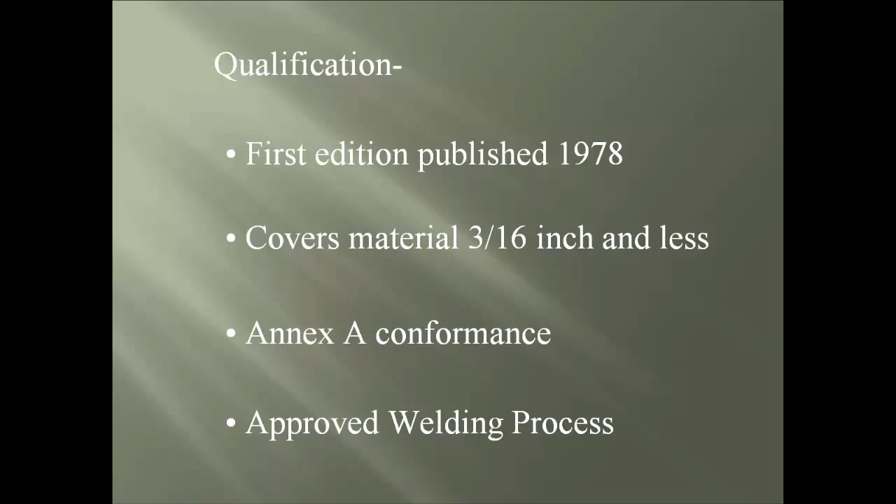The electrode for shielded metal arc welding process shall conform to the AWS A5.1 specification for carbon steel electrodes and the AWS A5.5 specification for low alloy steel. Now, if any other electrode specification is needed to be used, it must be approved by establishing a PQR.

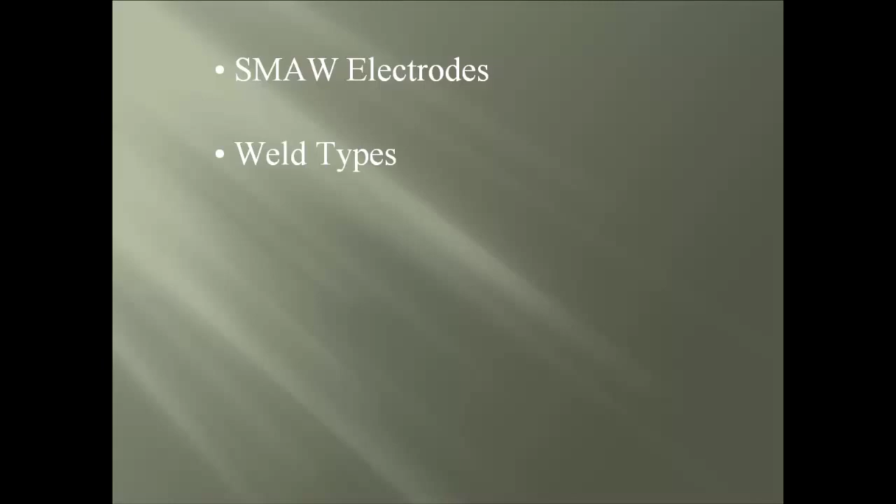The following weld types are approved: the square groove in a butt joint, fillet welds in a lap or T-joint, flare groove, arc spot, arc seam, and arc plug. The way to match the correct filler metal with the base metal being used is found in Table 1.2.

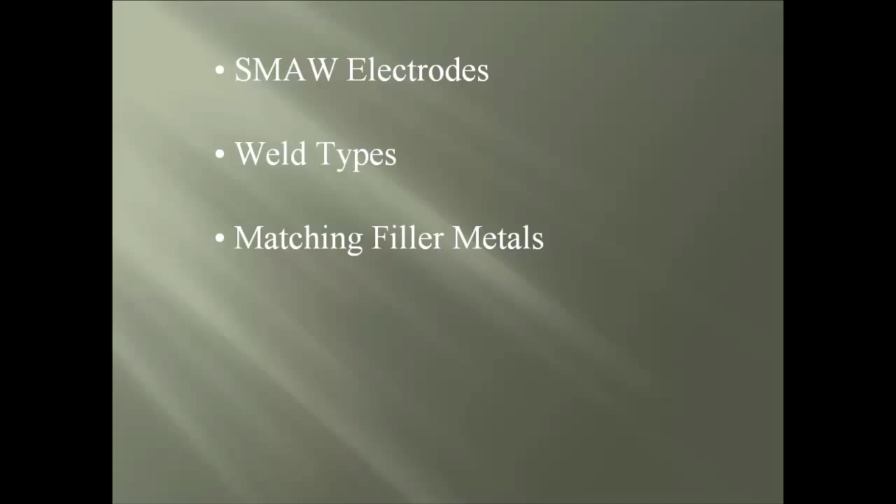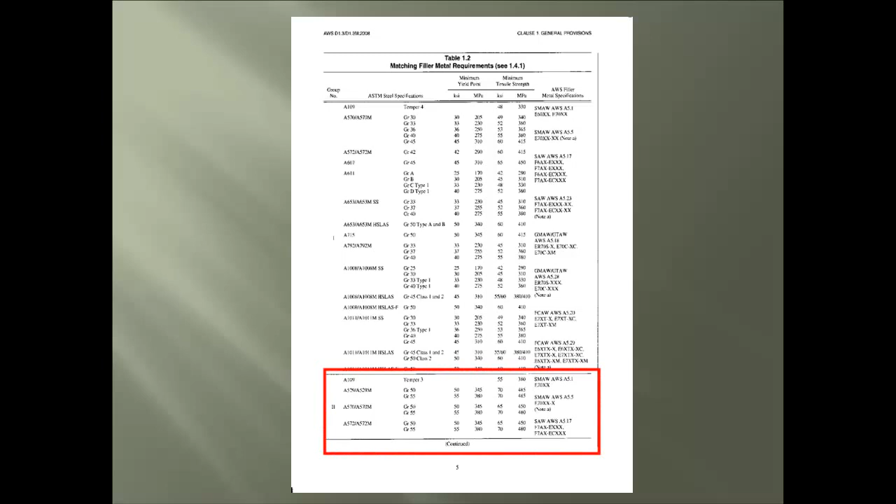Here we see the AWS Table 1.2, and we will take a closer look at this section of the table. The QC and QA professional needs to understand that these two parts of the table must work together for finding the correct information. So first is the grouping callout. And with the closer look, you see we are in group number 2, which is how the base metal is sometimes referred to.

Next, we see the actual base metal specification plus the grade for this group 2. Now a quick tip. You might have seen the same base metal found in another grouping, but slow down and check the grade, which will be different.

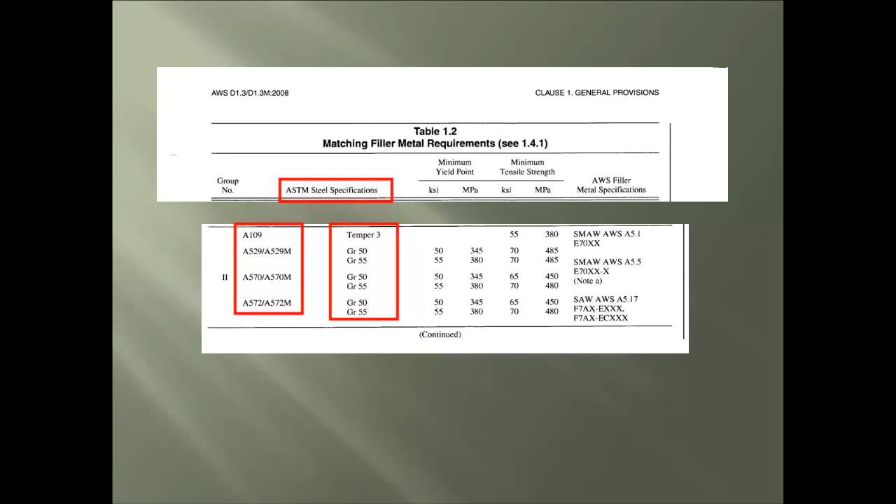Next are the two areas that cover the minimum yield point, providing the KSI, which means kips per square inch, and the MPa, megapascals, numbers. And then the minimum tensile strength, also providing the KSI and megapascal numbers. And lastly is the filler metal specification and classification that is approved to be used with the base metal within this group 2.

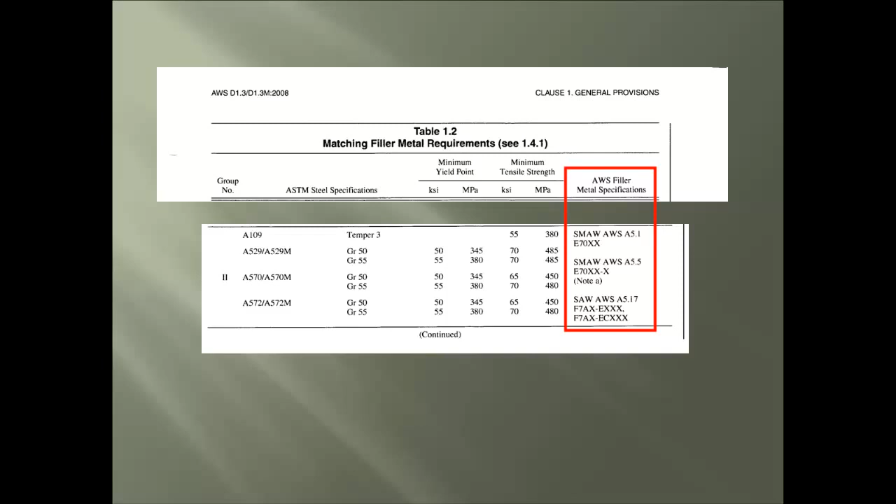Now let's cover some minimum and maximum for welding of sheet metal. First is the minimum length for a fillet, flare bevel, and flare V groove weld, which is 3/4 of an inch. Second is the minimum leg length of a fillet weld for a lap joint or T-joint, which is the thickness of the thinnest material used.

Third is the minimum fusion surface of an arc spot and plug weld, which is 3/8 of an inch. Fourth are the weld washers, which should be within 0.05 to 0.08 thickness. Fifth is the minimum width of an arc seam weld, which is 3/8 of an inch.

As we covered earlier in the seminar, a pre-qualified WPS is a written living document that includes the recorded values for each variable approved by the D1.3 code that will produce a sound weld assembly.

Now, when the contractor does this, it's defined as exempt from a qualification test as long as the assembly is between sheet steel to sheet steel or sheet steel to a structural member equal or less than 3/16 inch in thickness. And if any deviation from the joint details approved by the AWS committee happens, the proposed WPS will need engineer approval before production can begin.

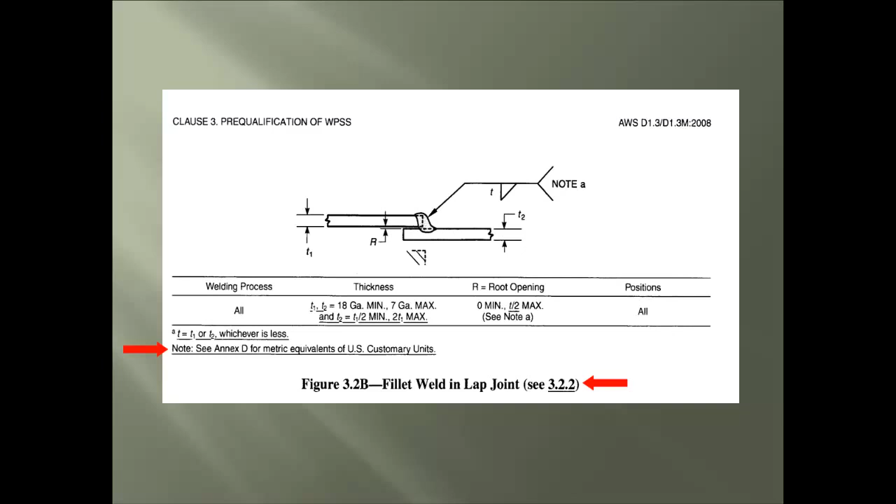Now we see even using a small detail like this, you must be heads up for any notes provided. And we close with the actual figure heading, where we see the numbers 3.2.2 in parentheses. And this refers you back for a better explanation within the code for this joint detail.

Okay, we just reviewed the pre-qualified WPS, but remember, even with sheet steel, there are the PQR and WPS qualified by testing. Once again, the WPS qualified by testing is a written living document for each type of weld, which must comply with the AWS D1.3 code requirements, plus be accepted by the engineer of record. And the PQR is also a written living document that records the actual values used to establish the WPS qualified by testing.

Another quick tip: the melting rate data of a shielded metal arc welding electrode that is provided in the D1.3 code commentary may be used as a measure of welding current for both the WPS and PQR.

Table 4.2 of the D1.3 covers the PQR essential variable changes. We have seen this table format in the segment for the D1.1, and the meaning is the same, which is, if any deviations take the parameters of a pre-qualified or a qualified by testing WPS out of the table's allowed tolerance, it will need to be re-qualified.

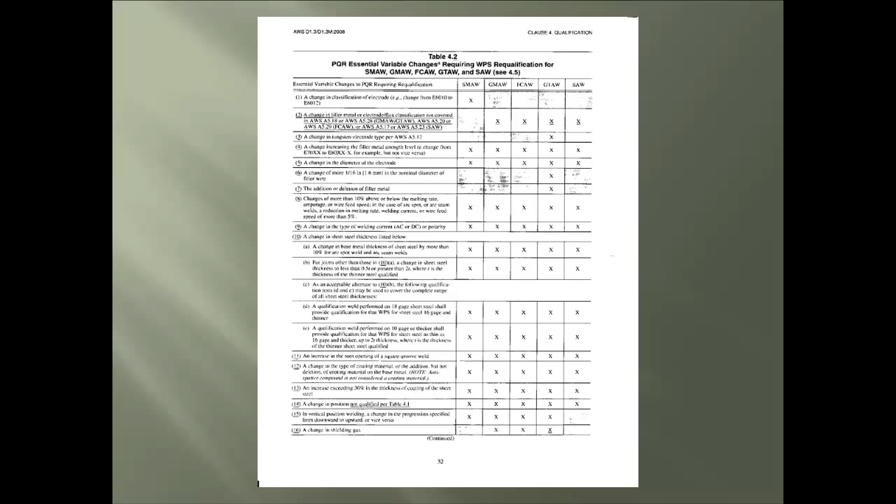This is a typical term confused with the qualification test. Remember, the qualification test is for the weld assembly, whereas the welder performance qualification is for the actual personnel. This qualification will establish the following with the welder: the welding process, electrode grouping, welding position or positions, direction of welding, and any specified conditions.

Plus, the performance test has the welder satisfying a number of tests and methods that, once passed, will be considered remaining in effect indefinitely unless inactive for more than 6 months or a reason for concern with the welder's ability is raised.

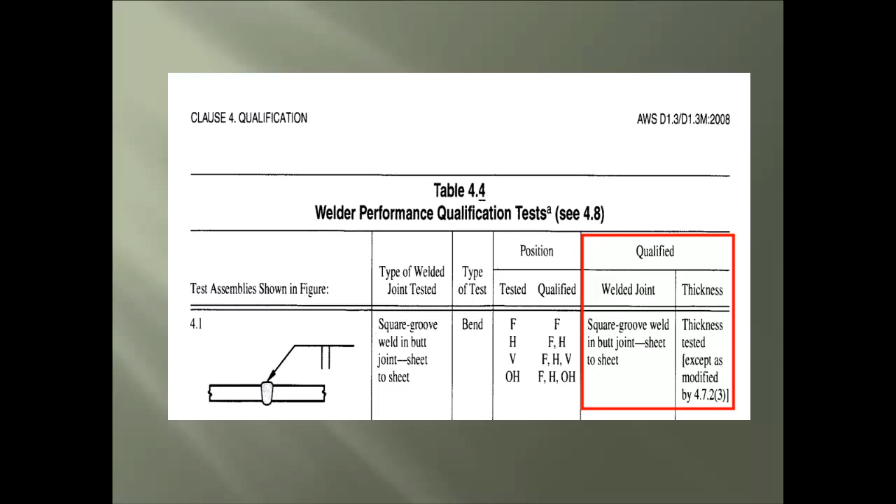We move into the second topic of this segment, and that is the fabrication for welding of sheet steel, with the first item covering the adequate weather protection during production welding. This one item includes the ambient air temperature, not to mention the base metal, plus the wind speed during the welding when gas metal and gas tungsten arc welding, plus flux core arc welding when using gas shielding processes are used.

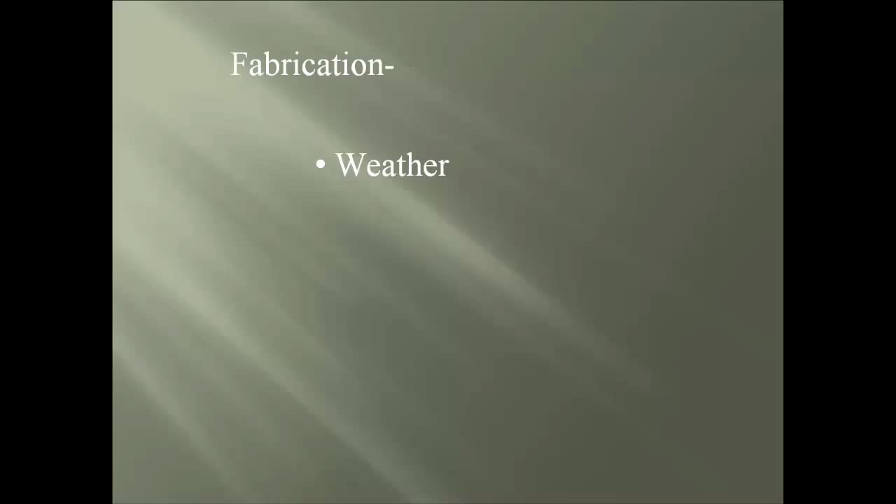Base metal surfaces are next, which should be free and smooth of cracks, tears, etc. that could affect the quality of the weld assembly. The third item is the joint, which should be arranged for the most favorable positions to weld. That includes the base metal being brought together as close as possible for complete fusion. And lastly, another quick tip is if the backing material satisfies ASTM A109 temper 3 or 4, it can be used without a qualification test.

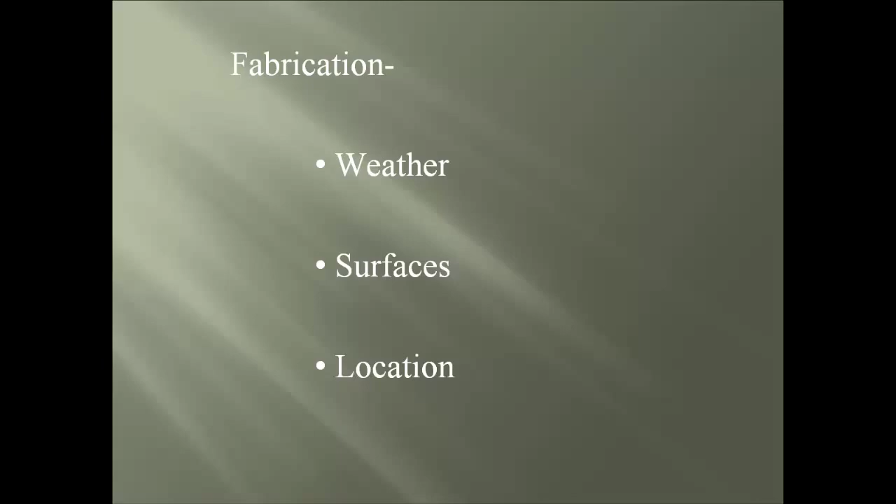And lastly is the third topic of this segment, which is the observation of the welding for sheet steel. First item is the acceptance criteria of the production welding, which covers the visual observation of the preparation, fit-up, and welding of the weld assembly, with issues as no cracks are allowed, no evidence of lack of fusion between the base metals, proper reinforcement height, correct accumulation of undercut, proper weld face shape, and compliance with approved documentation for location, size, and length of weld.

Next is the contractor's responsibility, which includes the proper approved WPS, whether pre-qualified or qualified by tests, plus welder qualification, and providing access to the work area with safe conditions. And lastly is the work itself. At any time during welding, a request of electrode melt rate, wire feed rate, or welding current can be compared to the approved WPS, and if the quality of the welder's work is judged to be below the requirements of the specification or code, a requalification of the welder can be requested.

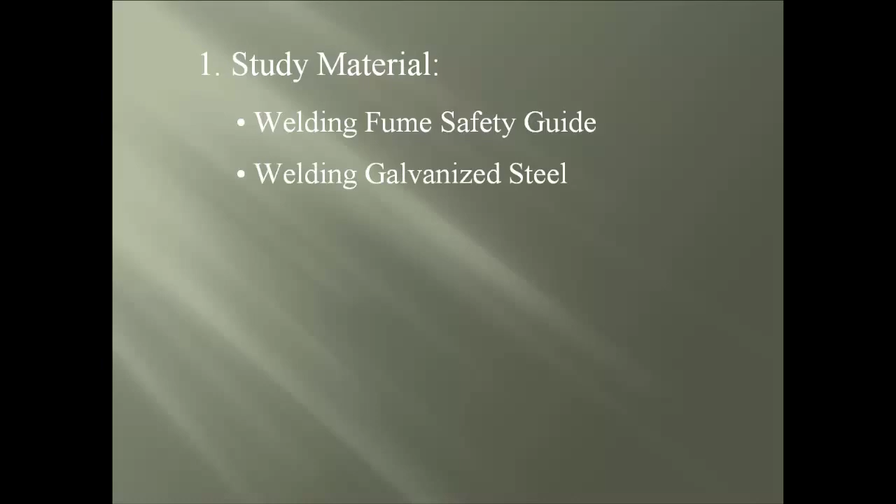Well, we have reached the study material for this segment, and you will be reading some very fine guides dealing with sheet steel. First is a safety guide dealing with the very dangerous fumes that are put off during welding. Next is the welding of galvanized steel, while finishing with the SDI manual for construction with steel deck.